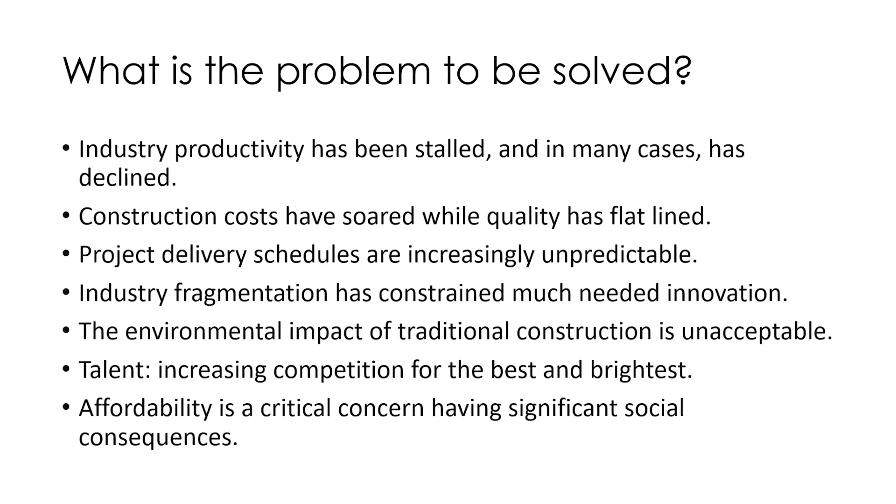And then finally, particularly within the housing space—and we're talking about housing across all sectors, whether student housing or multifamily housing—affordability is a critical concern and it has really significant social consequences. So these are the things we're trying to address.

And then the McKinsey report about productivity, issued in 2015—that's a long time ago, 7 years ago—you realize there's still quite a bit of opportunity in what they gave us. There's really 7 opportunities that McKinsey recognized as a means to significantly improve construction productivity.

One: reshape building regulations. Rework contracts. Rethink how we design. Improve procurement and supply chain. Improve on-site execution. Integrate technology and explore innovation. And reskill workers.

On the first, it's hard from the contractor side to impact regulation, but to a degree, I think the story I'm going to share with you, you'll see how we are nudging that along in terms of delivery. Certainly, we're going to try to rework contracts and how we think about contracting. Third, we're definitely going to challenge how we do design. And this story is very much about procurement and the supply chain, and improving on-site execution.

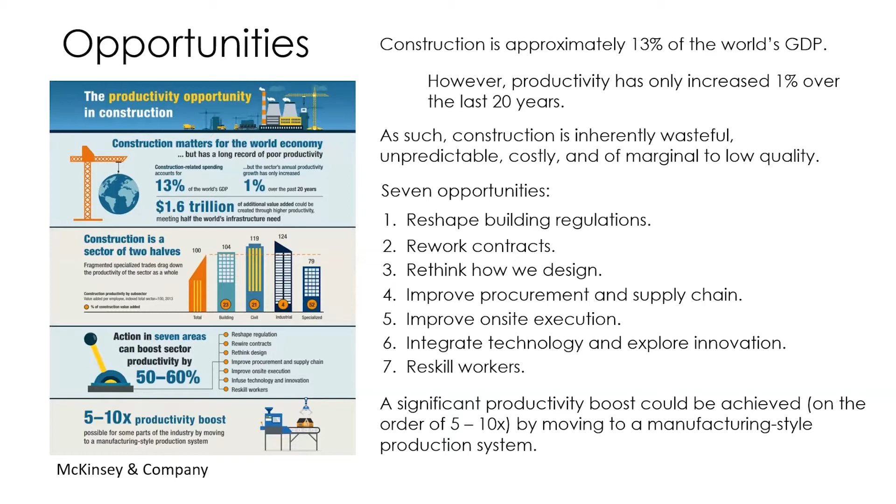And we're going to leverage some heavy technology and ultimately explore some innovation. And the last one is we're trying to move construction from the field to the factory. So we're trying to really take advantage of all of that. I'll tell that story and where we are in terms of that development.

And that is the Complete Facade, Clark PARC—the office building that John Moll just presented on—and then our housing solution. In that middle, super subcontractor phase, we learned a lot of things, right?

One, because factories are land-based, they're geographically positioned, and you don't want to be hiring and firing in your own backyard, right? The first time you do it, you might get that crew to come back, but the third time you do it, it's like, 'I'm off to better things.' And so we wanted to avoid that volatility.

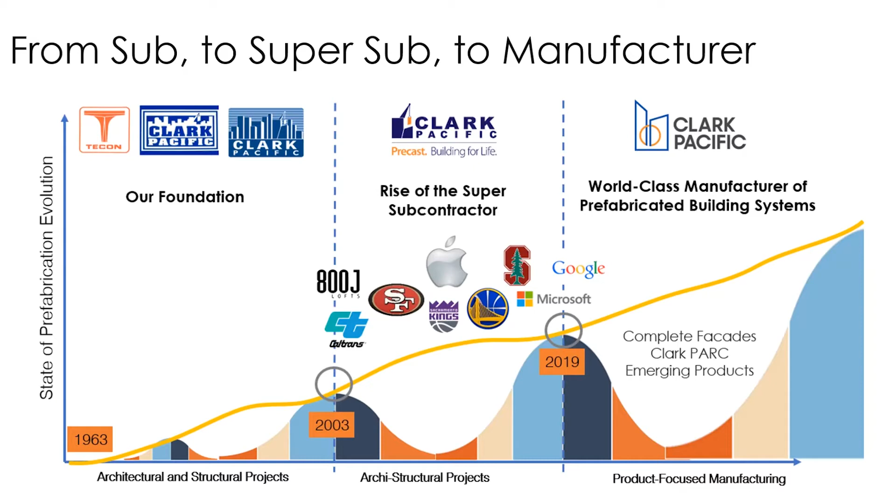And so really moving into a product-based mindset and finding a lot more consistency around manufacturing was an important direction to go. So I want to talk about establishing a product vision, the objectives, the how, the design criteria. And really, when we talk about design criteria, it's about value creation, and then really about an evolving product feature set.

So in the first case, we're really talking about transformational housing. And what's transformational about it? We really want to attack first cost. We want better alignment, right?

One of the things you start to learn when you go out to the marketplace and talk to the users is the housing product being delivered does not align with their needs. There's a lot of backward, regressive ways in which the market evaluates the go-forward. It looks backwards and tries to mimic the past, so what you get is a lot of regurgitation of the same thing. Obviously that's not cost effective, and again not aligned in terms of the features and the way people want to use housing stock.

And then finally, the environmental impact. The objective, the how to get there, is really the importance of market research and an aligned manufactured kit of parts around a housing product, focused on what the user wants.

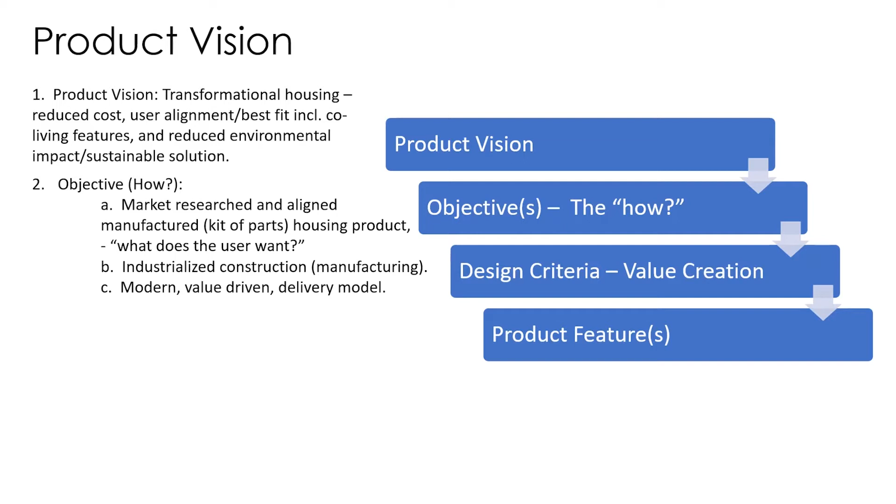It's really important that you can do offsite, you can manufacture, but if you can't put the product in the field and deliver a finished product, you really have a high potential for defeat.

The design criteria is effectively the evolving feature set, but these are the criteria by which you're going to evaluate value creation. The last piece is the evolving feature set, meaning we're going to version the product going forward. That's important because you want to take manageable steps at a time.

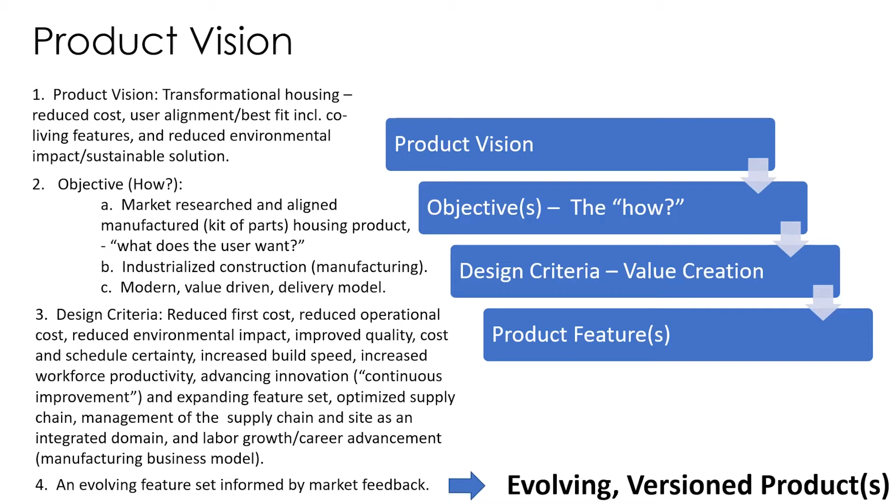We wanted to establish a scope of prefabrication. One of the starting points when I came on board was we really wanted a volumetric approach, and a volumetric on this piece requires a high degree of standardization.

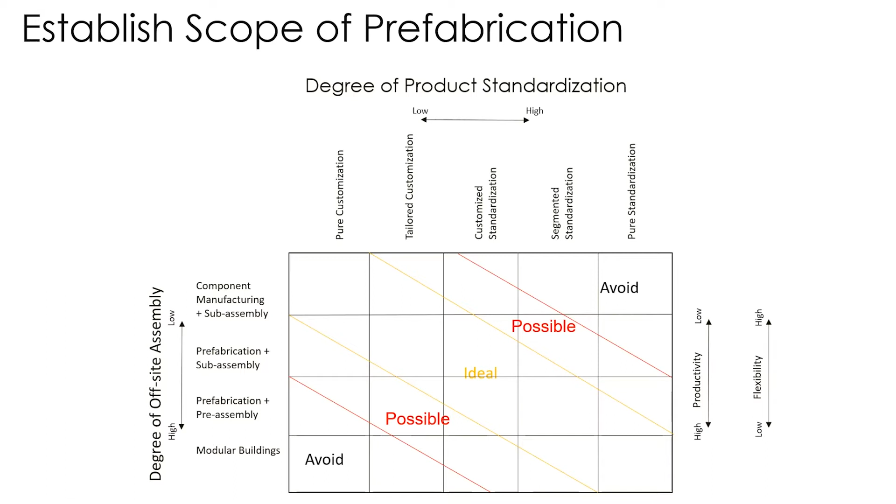So you really want a suite or toolkit of prefabrication that you can piece together, in a modular concept kind of way where the pieces and parts assemble very much like a Lego set. That's what this is really talking about.

In that, we want to create a product ecosystem, which is the vision. Right now, Clark Pacific is doing precast floors and precast vertical, and to that we've added cold-formed steel wall panels.

We have the ability to do steel frames, windows, architectural precast, and stairs. We can start to assemble these pieces and create facade panels, wall panels, and then floor panels.

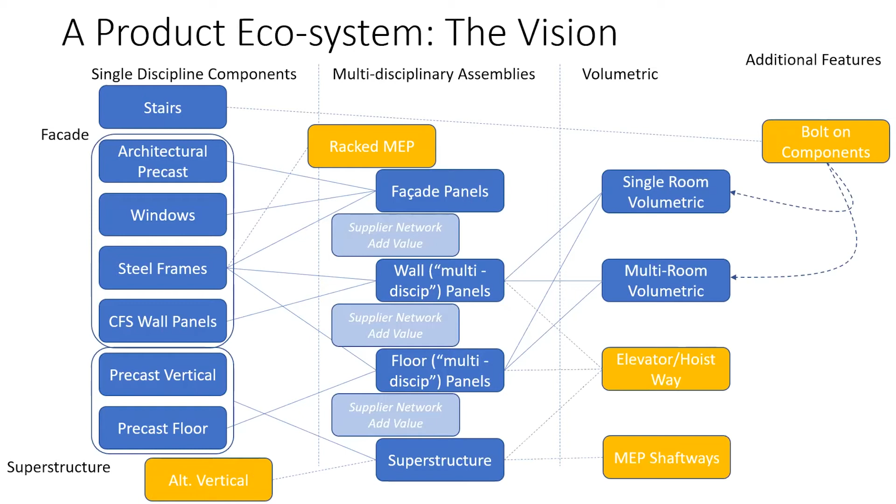To that we can add the next layer, which is bringing our partners in, exploring alternative vertical systems and a supplier network to add value, say from an MEP point of view. You can go to racked MEP, bolt-on components to the volumetric such as balconies, etc., and build that inventory of product up in elevator hoistways, etc.

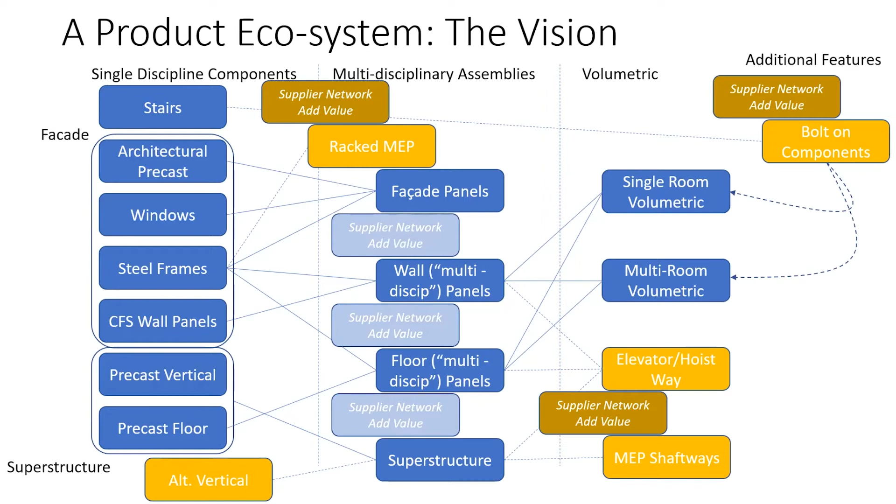Each time we're looking through partnerships, very much how Boeing operates, we're an integrator. Working from the idea that there are others with far more sophisticated solutions, we want to work in partnerships to build this inventory, this product ecosystem, to ultimately deliver the transformational housing.

Product development really is about usable product increments. We want to evolve people, processes, and tools, and align it to the market and ultimately the product.

This is the story of how we started with Munger Gen 0, which was a prefabricated exterior. Then Comstock came along, which was prefab structure. Then Escondido Village at Stanford came, which was really an archi-structural solution relying heavily on integrated facade and integrated glazing, designed from a production flow point of view to deliver the project in an expedited way in the field.

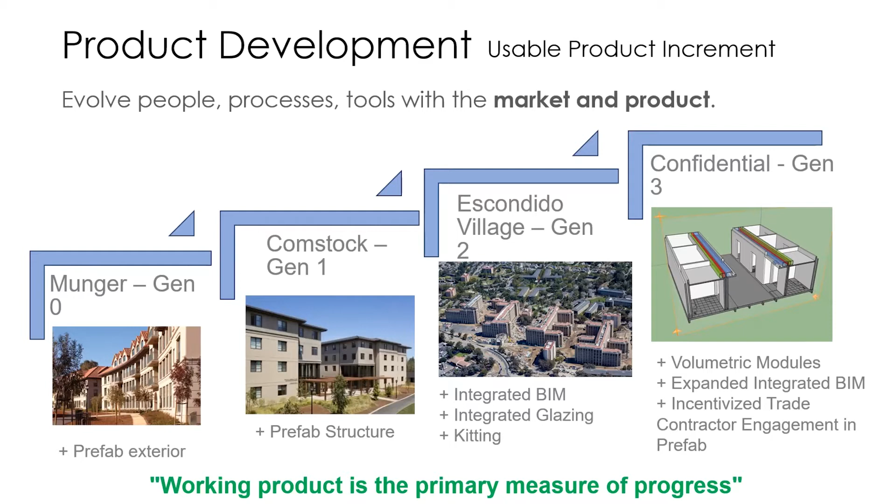And then the last one is, we're now working on a Gen 3, which is really a volumetric solution. I'll ultimately get to a story - at one point, Clark Pacific had a volumetric and just couldn't find a way to move it forward. So we're actually digging up a bit of history in coming to our fourth state.

So leveraging design thinking is really the first and foremost. We want to be a market-aligned product, and so we want to really direct research. We want the user's understandings, we want to understand what their need is, and we want to align it. We want to learn it.

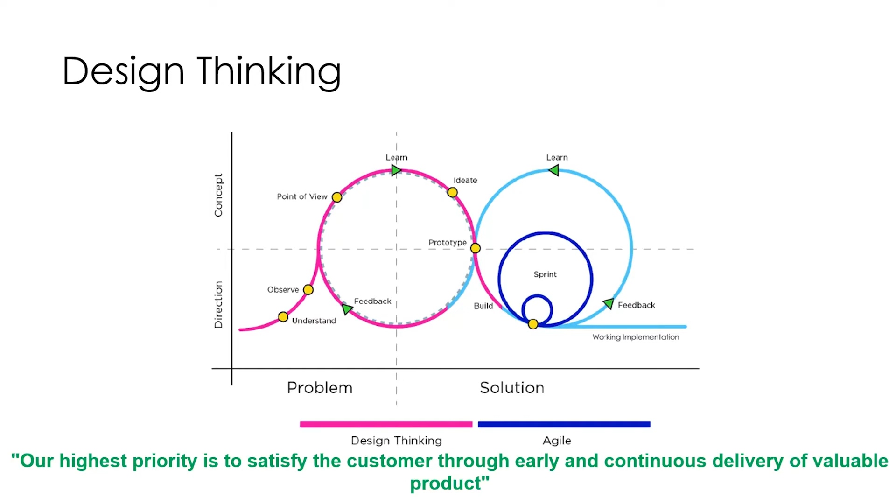And then we're going to prototype that, and we're going to leverage Agile to work through sprints to ultimately prototype and version, ultimately to a working implementation. It's super important to leverage this, because you've got a lot of variables in play. And then the idea of incremental work - diverge, emerge, and converge.

This is really an innovation backlog in which we're capturing all of our ideas - what are all of the possibilities that we might want to explore? So identifying the innovation, and then we want to verify the alignment. Does it actually fit the vision? Does it actually fit our design criteria?

And then we'll go through a process of research and analysis, and that's the prototyping and the A3s to really align it. And then we're going to qualify that - go back to the vision. Does it really align with our vision? Does it satisfy the design criteria, ultimately leading us to implementation?

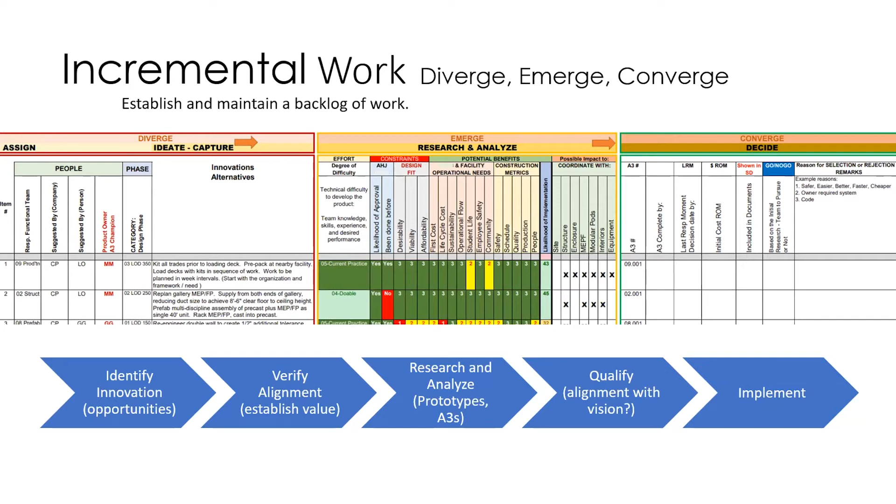And then prototyping, testing, evaluation, and implementation, working through the A3, and this idea of continuously going through this Scrum - ideate, prototype, test, evaluate, redefine, and do it again. And here you're seeing an A3 at the bottom.

You're seeing micro mock-ups, really looking at different wall assemblies. We're testing it from a cost point of view, but we're also testing it from an actual manufacturing perspective - what is the time demand to produce that product? And then ultimately we can full-scale prototype that, and you can see you're actually designing the product around flow and throughput through the factory.

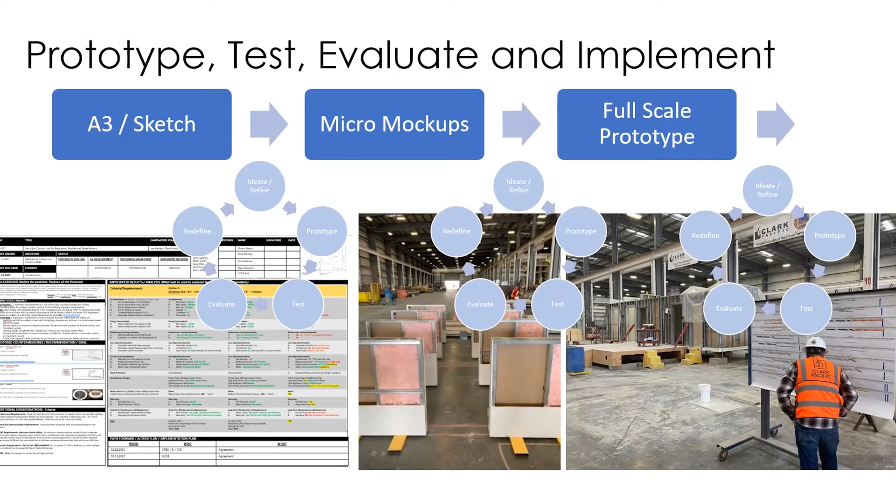And one of the very first products out of this, if you start thinking about a modular concept, is really the wall panel. Here you can see a wall panel laid down with integrated electrical UL assemblies - you see the boxes, the spreader bar, and the MC cable.

And again, we want to rely on partnerships and their expertise, so this is coming from an electrical partner. And then on the right, you're seeing plumbing inserts, and those plumbing inserts insert into the wall. The logic here is we want sub-assemblies, manufactured components that come to us where they're already sophisticated, and then we just have to integrate it into our assembly.

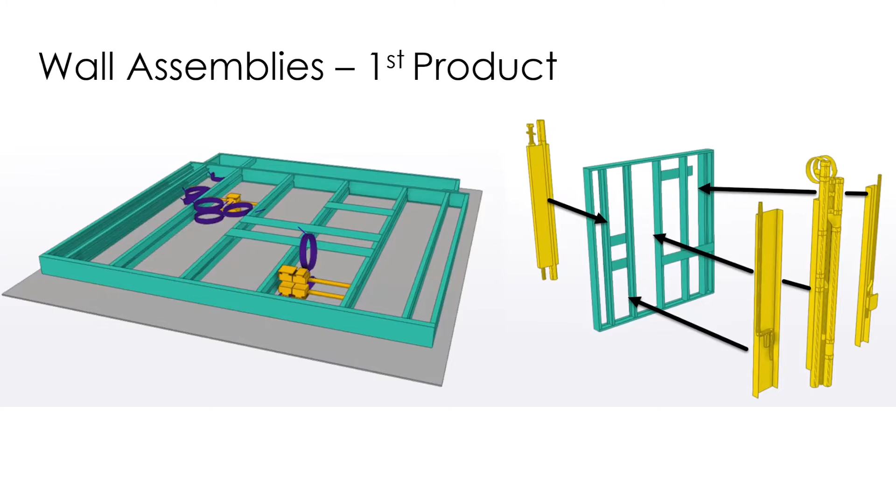So this is really our very first product, and the idea here really is we're just continuously adding value through integration. And then future development is looking at drywall substitute, head of wall, architectural closure, and further smart tech integration.

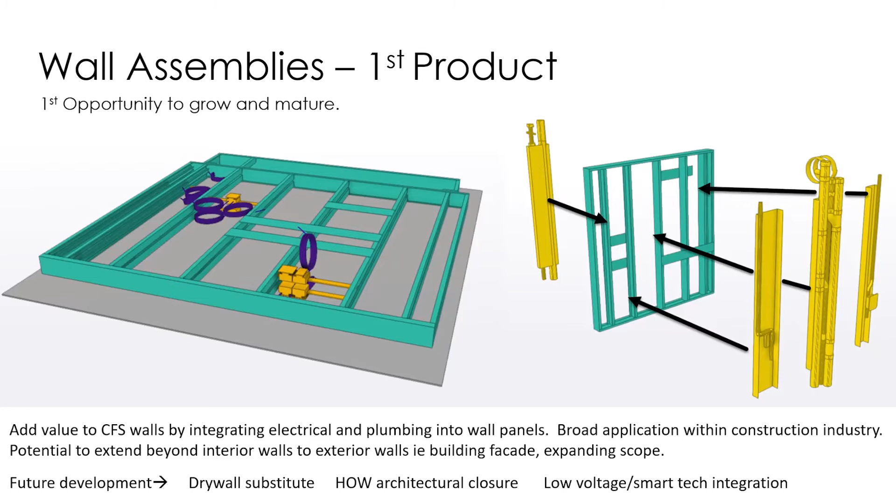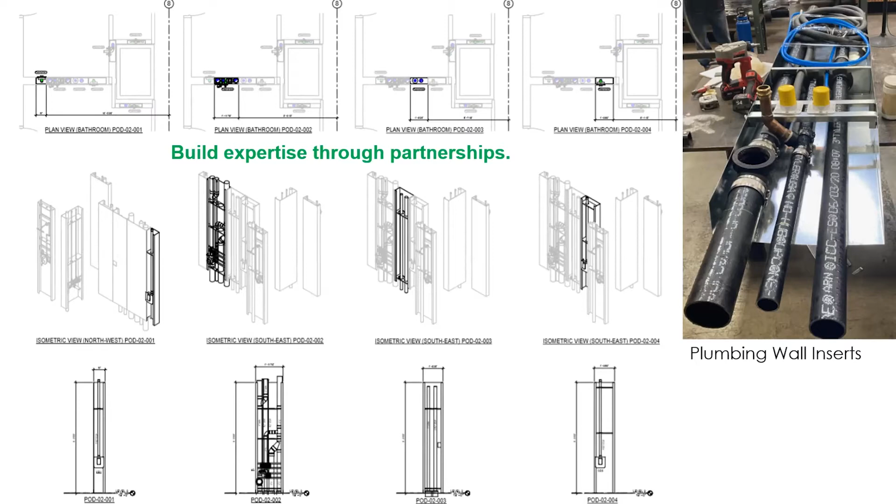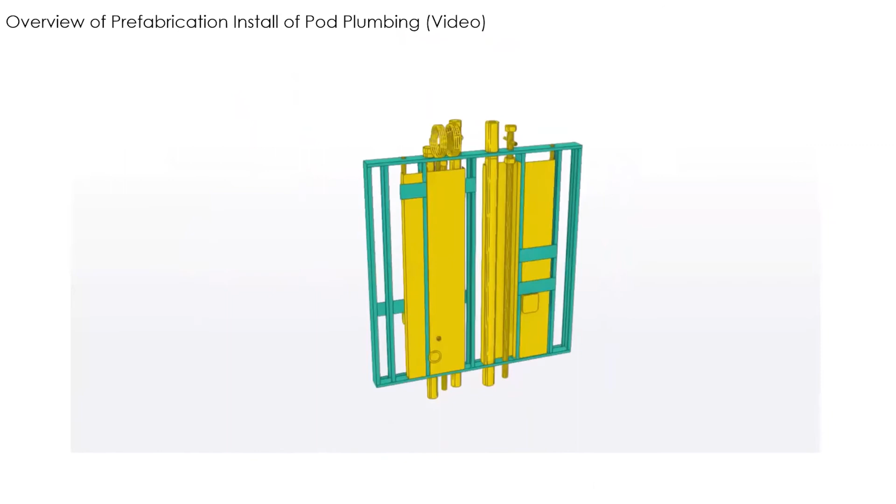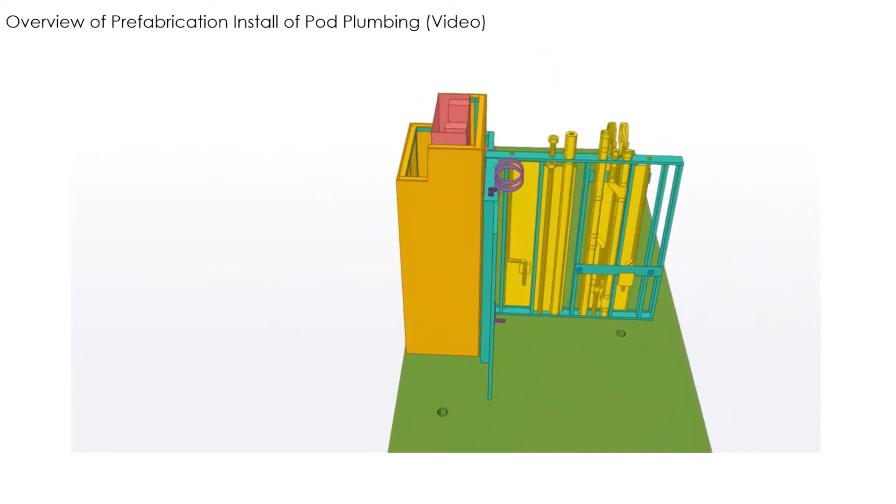Plumbing inserts - so you see the wall panel, it's integrated, it's now fully plumbed. You see a shaft, you have precast plank laid down. Wall panels are starting to get laid out, and you can start to see how we can start to build up value. And John Moll hinted to this - by adding all the other disciplines, you constantly are increasing the value of the product.

And then you get a volumetric, and you can see how the plumbing connections are made overhead.

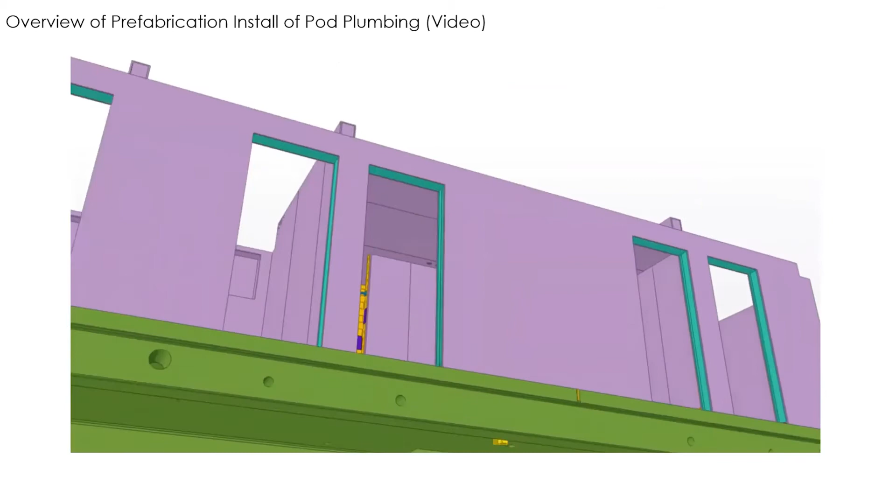And the plumbing connections under plank. And this is one of our very first modulars. It was a study, a missed opportunity, but a study of a volumetric. And again, you can see the precast plank, the cold form steel walls, the integration of electrical UL listed assemblies, and then an interior shot.

And again, the idea in the volumetric, and the importance of choosing the right prefabrication strategy, is how complete do you actually want the product. In the case of a volumetric, you really want to push it over 80% complete, if not more, because you don't want work in field to have to track back through something that you've actually manufactured.

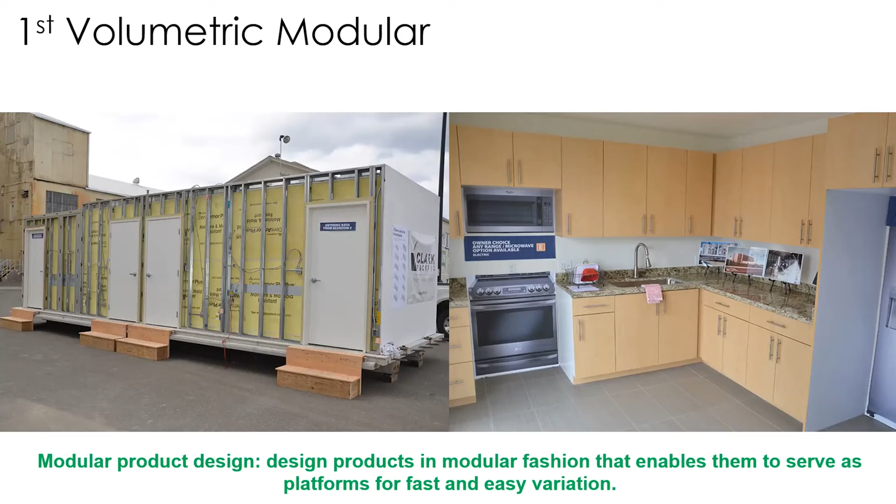Then the next piece is really about information flow. We needed transparency across all information. We need to have reliable and durable decision-making, super important. And manufacturing requires an EBOM and an MBOM. An MBOM is how it gets assembled, and an EBOM is how it is designed. What are the parts, the assemblies? It's basically the bill of materials.

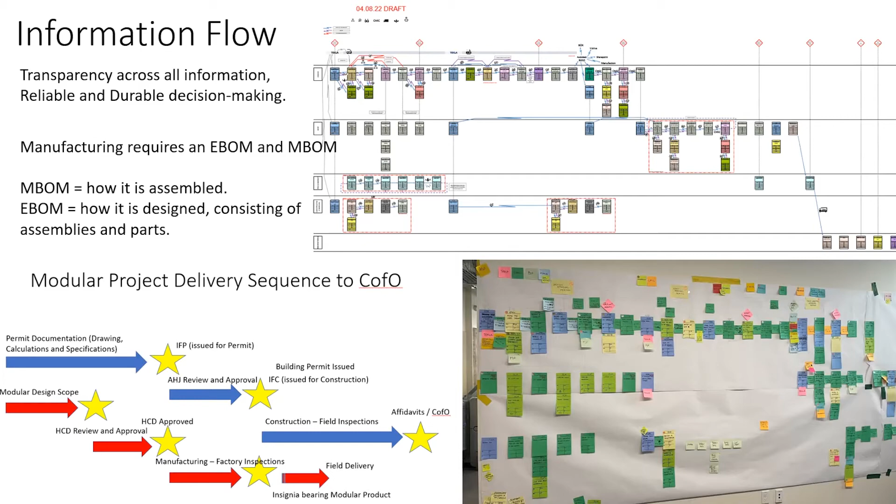So we mapped the modular project delivery sequence. We took a standard project and then mapped how modular makes it different. And on the right is effectively the scrum to break down all of the players within a theoretical project, and what is the information flow required to deliver that project, and how do you arrive at an EBOM and an MBOM. That is critically important because you're rushing to be able to manufacture volumetrics.

And then clear definition, clear demarcation, and alignment of what are you going to do in factory and what are you going to do in field. You have to have clear delineation in that, and be able to tie them together. For example, you do not want to be ordering doors for a pod with the expectation that the entire project is going to have the same door type, but at the end, somehow that purchasing gets bifurcated, and you end up with two different doors on the project. You need to have a comprehensive plan to deliver that.

You have to clearly demark what factory and field is, and then you need to get that aligned.

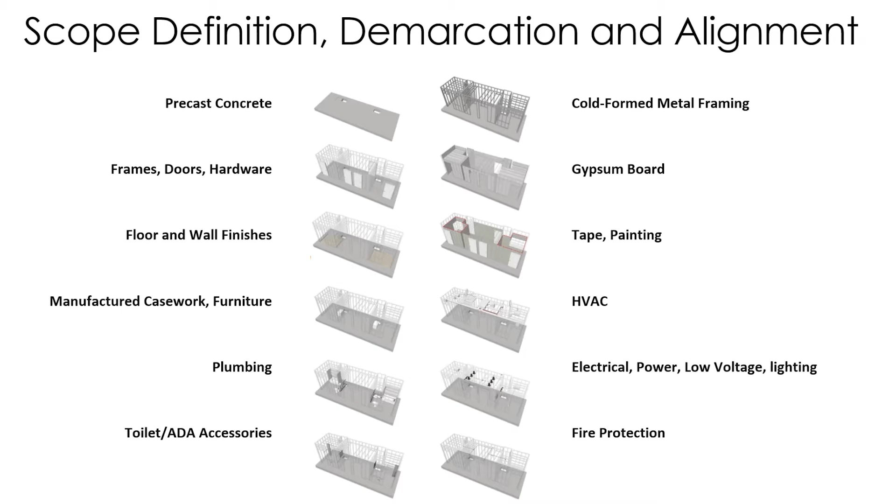And then the next big step in this evolution was really changing the delivery model. We've all seen this curve, right? The cost of design changes later in the project goes up, the ability to impact project outcomes goes down with time. Typical design efforts flow along that line around construction documentation. But to do a prefabricated or manufactured scope, we got to shift that design effort towards concept. And in doing that, we're enabling the process to commit to prefabrication.

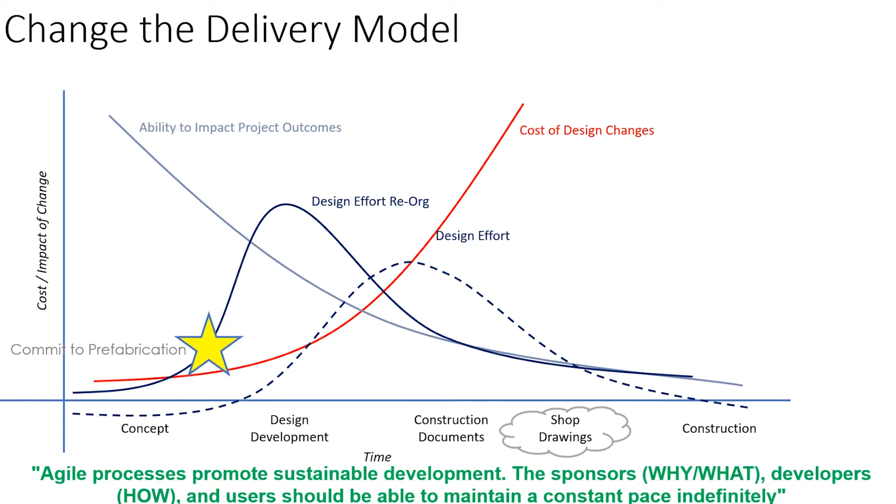That is a big ask, but it's an important piece if you want to unlock the value of manufacturing. Obviously, you're trying to speed up the project. And in speeding up the project and committing to prefabrication, we're really trying to get that fabrication knowledge into the project very early. So what normally happens on a project is the shop drawings and the how things get done actually gets baked well after construction documents. We're actually moving that forward.

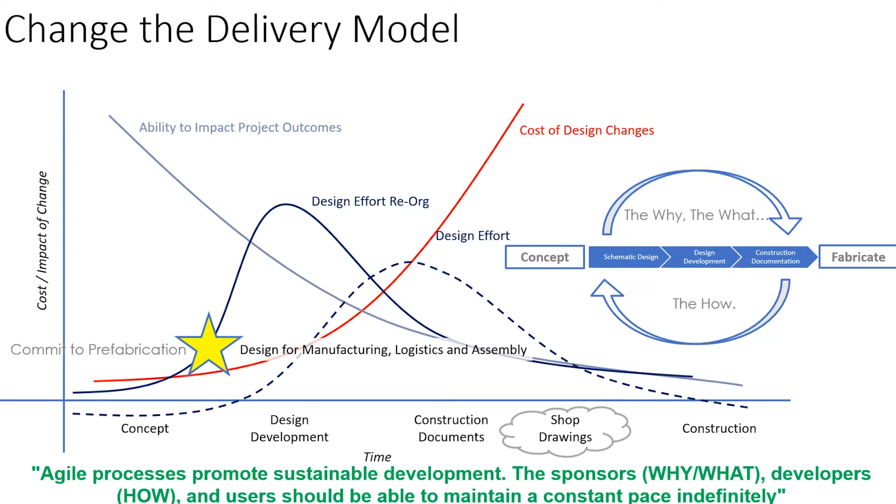And that is designing for manufacturing, logistics, and assembly. What's important here is, the why, the what, which is typically the linear arrangement of moving from concept to construction documents, and then ultimately the shop drawings that fabricate it. We want to move that fabrication intelligence forward, and that's really important in pressing the button to commit to prefabrication.

And then the next piece is really the alignment of factory and field, having good delineation there, and ultimately working towards an integrated domain. So the management of logistics has really 5 key roles. One is first, clarifying that interface between factory and field. The next one is, once you have clarity on that, you want to improve and make much more effective your supply chain. And then you want to take a look at your construction site, and really look to optimize the logistics, the site movements of a construction site.

And then once you can start to look at what's going on site, you can see what your flow is at site and where you have bottlenecks. Those are your opportunities to transfer activities from site to the supply chain, i.e. to manufacturing. And when you get past that and you get to that place of managing the supply chain and site as an integrated domain, you really have opportunity to hit all of the issues that we're trying to change. And that's the ideal state.

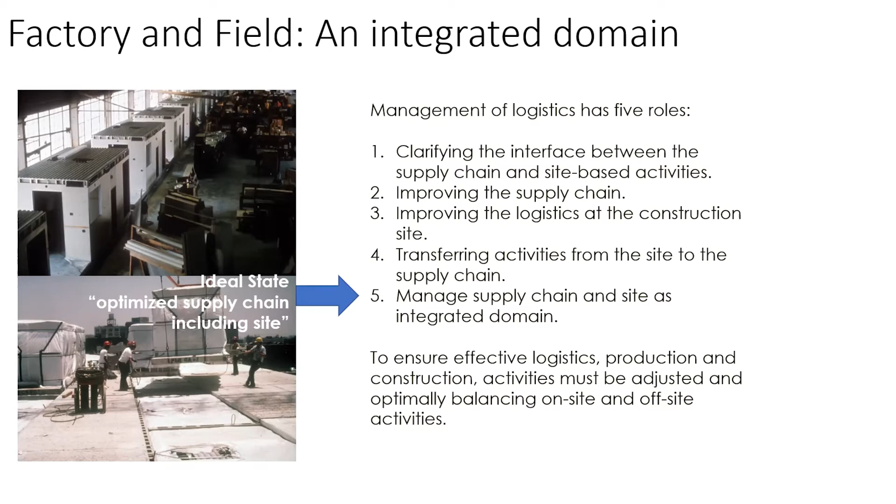I hinted, Clark Pacific sometime in the past, I believe it's in the 60s, was producing volumetrics. What you're seeing there is a volumetric product that was done with Forest City Dillon on precast plank. That's effectively that solution, and those projects are all up and down the state of California. But as the market went, it happened, and then it died, and then it was lost. And so really the idea of bringing it back.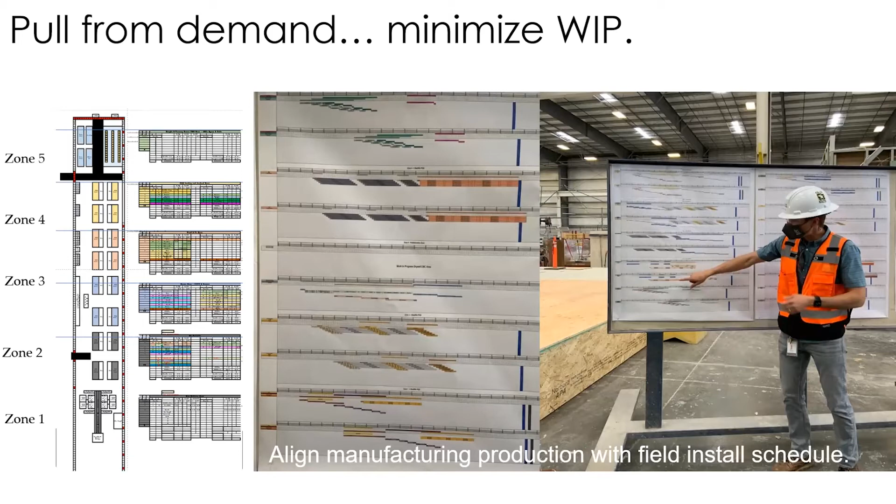And then here is really looking at the factory. The factory producing volumetrics is divided into 5 zones. And again, we want to pull from demand. We want to minimize the amount of work in progress. So, again, looking to site, looking to see this as an integrated domain, and actually manufacturing, not just in time, but minimizing to have the right kind of inventory so that you're not carrying so much. Work in progress is basically cash locked up, and you want to minimize that to the best you possibly can.

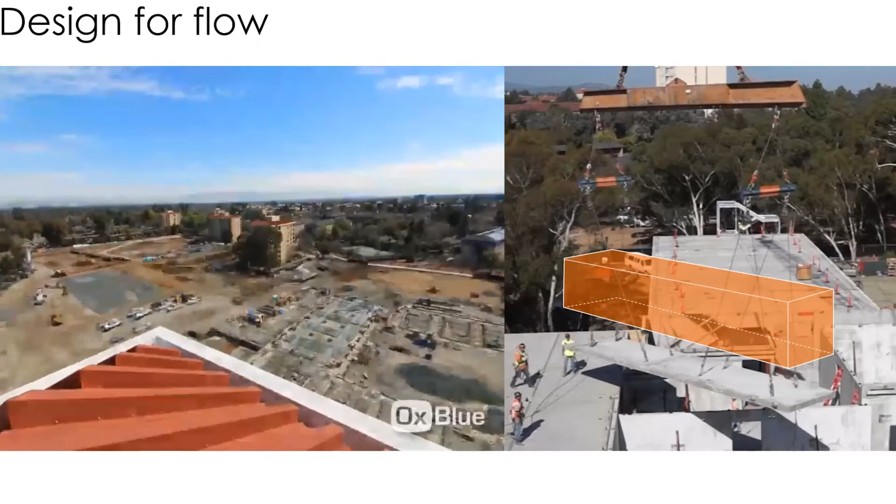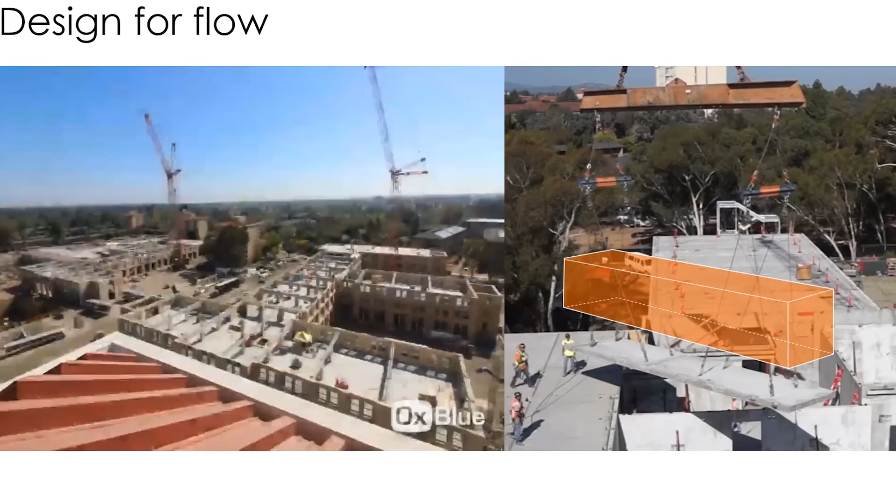And then designing for flow. On the left, you can see this is Stanford Escondido being built. It was an archi-structural project, concrete moment frame, fully glazed, moment frame, precast plank, 4 buildings built, and they're all sequenced. And there was a logic to it. It included kitting, which also brought materials into the building in a sequenced way that really started to improve and optimize the site movements.

And in doing Stanford, this idea that, oh, did we miss an opportunity? And you can see a plank being dropped into Stanford, and it was the opportunity. It was the missing volumetric. Had we captured that, it would have improved the overall delivery of the project.

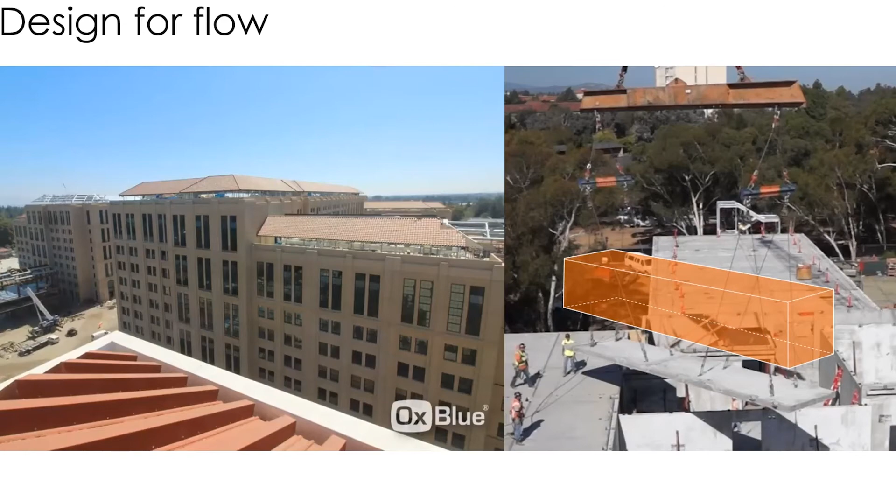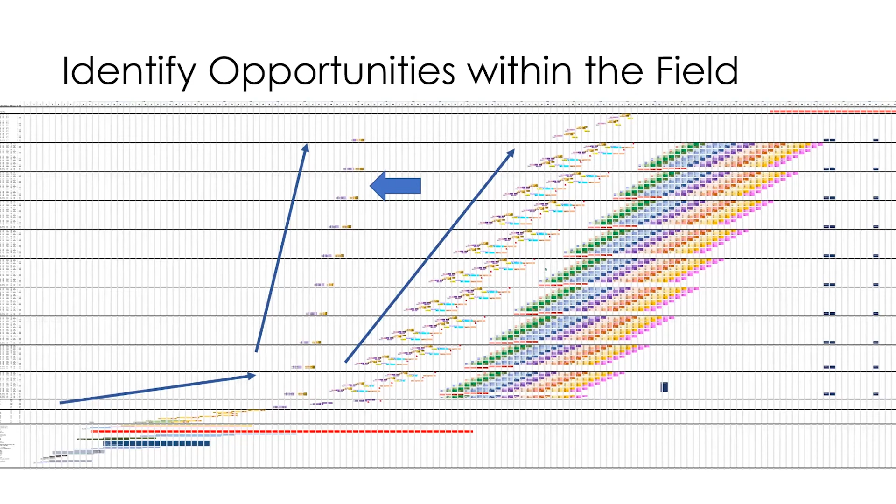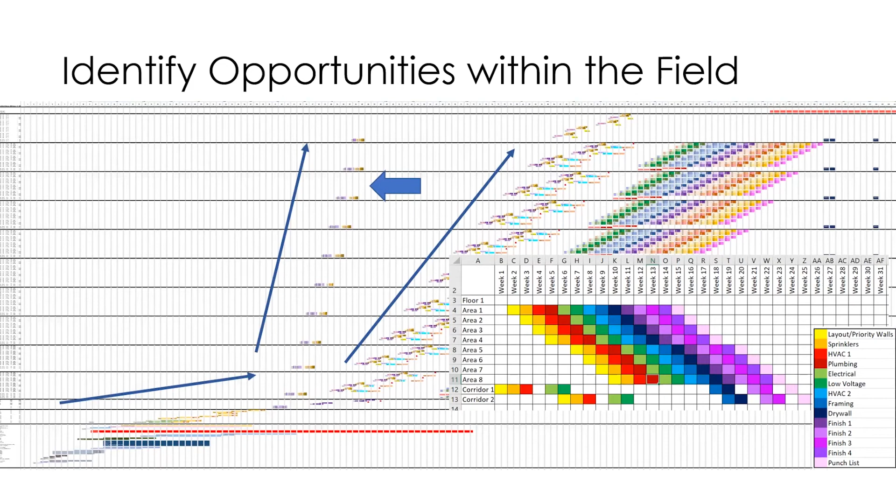And then on the right is all of the interior work to complete the project. And you really want to look at that on a week by week basis so that you're actually moving your trades through the project in an organized, efficient way. And again, where you can't operate on a week to week basis, those offer the opportunities to identify those moments to bring prefabrication to the project.

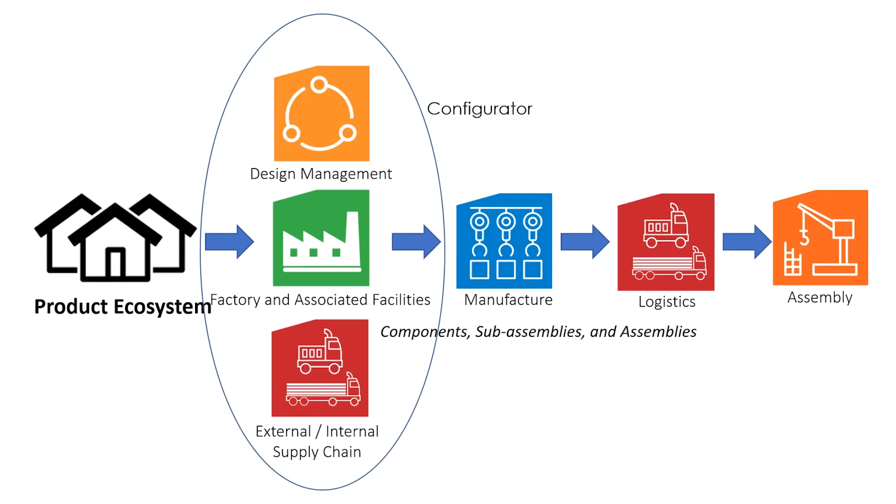And so then bringing this all together, the product ecosystem, we're going to configure really based upon design, our factory and associated facilities. So these are the assets that Clark Pacific owns. It's also the facilities that our partners own and what they can actually bring together. And that's the external and internal partners. And once we're configured in that commitment, then we can move to manufacturing. And then the logistics, bringing the materials efficiently to site, and then ultimately into a complete project.

And so as a future state, the ambition around our product is effectively to be a design, manufacturer, builder. And that model delivers the effectiveness to deliver the vision of the product.

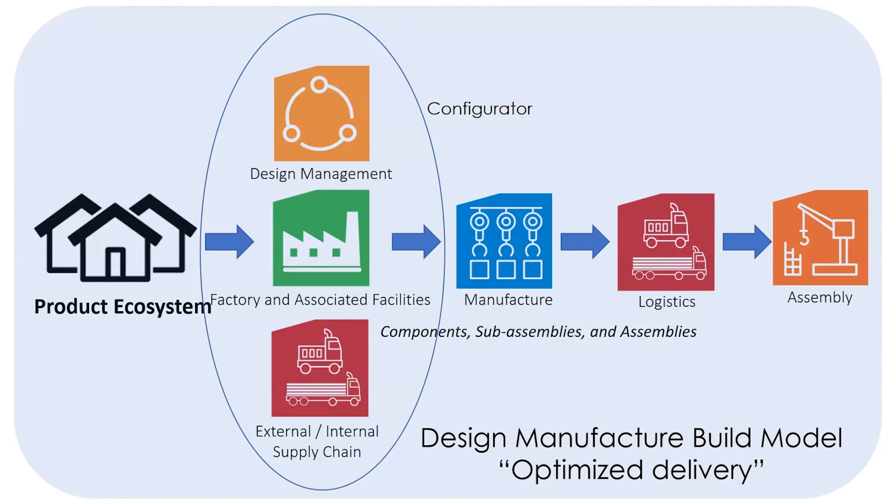And so at the end, what are the key priorities? And what I would offer is the takeaways. We really want to prioritize around people and interaction over processes and tools. We want to prioritize product viability and continuous improvement over a fixed basis of design. So that really is the versioning of a product. We want to prioritize collaboration and shared outcomes over contract negotiations. So that's really working with our MEP partners, our build partners, our GC partners, et cetera. We really want to be a collaborator. We want to be an integrator.

We want to prioritize adaptability and outcomes over a comprehensive plan. We've all been there. We spend all this time planning projects only for something to unravel, and we're not prepared for that. So we really want to prioritize adaptability and outcomes. And then we want to set vision for a long view, prioritize opportunities to achieve alignment. And so those are kind of what I would say are our big takeaways and the learning that I hope you can take away from my presentation. And with that, I'll offer up questions.

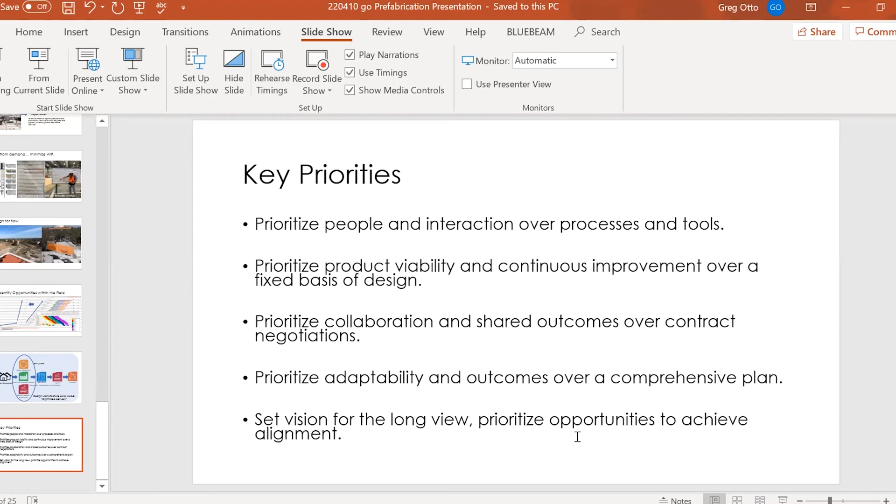Yeah, great. I think we have people coming back from breakout room 2. So maybe in the last 10 minutes or so, what are some of the takeaways? If there are still some speakers here or anybody else, maybe share something you've learned today, either through chat or just going off mute. Let's see what are some of the takeaways, or what could we do next? Was this helpful, valuable?

No, John, I think the biggest takeaway for me is the recognition that there are other people out there thinking like we do. And I think it's really important as industry professionals and leaders that we emphasize the value of integration from other industries, what they've learned in productivity, and integrating that into our models and being persistent about it. I think these types of engagements really help get the word out there that it's possible. The 100-year-old model that we've lived under is not what we're going to need in the future to meet the demands that are out there.

Yeah, great. Thank you, Randall. What else? Just something that came up for me was...